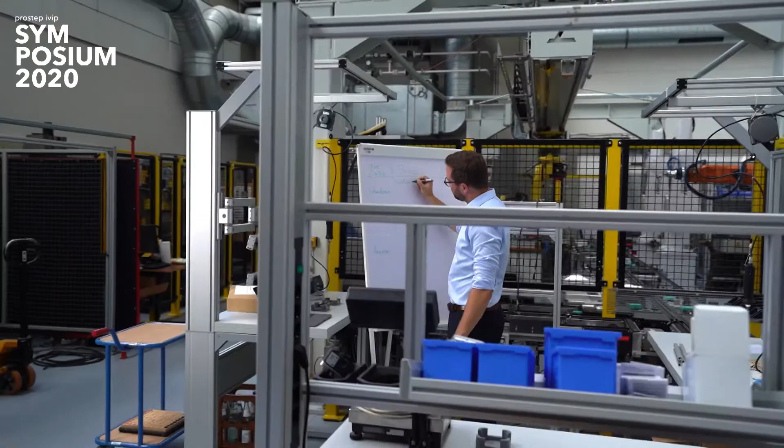And now we have it on stage. Max, thanks a lot, I think it was a great video and award trailer. So it's my honor on behalf of the association and the community to recognize your great work. We hope your future career will go along as planned.

What we have for you is — I'm not allowed to touch it — basically a little check here for you. But most important is the scientific award, a nice paper here. I think you've done tremendous work using bending moments in the tool holder to find out what's happening at the tool during body shell element milling. That's great work, we appreciate it, and we wish you all the best for the future. Thank you very much, very good. A little applause here.

Yes, he deserved it. So with that, we have a second category: the winner of the Best PhD Thesis in the global world of the prostep ivip Association. I'd like to first introduce this work: 'Hybrid Prototype in the Loop for Early ADAS Controllability Testing' by Dr. Christian Buchholz. Let's have a look at the trailer first.

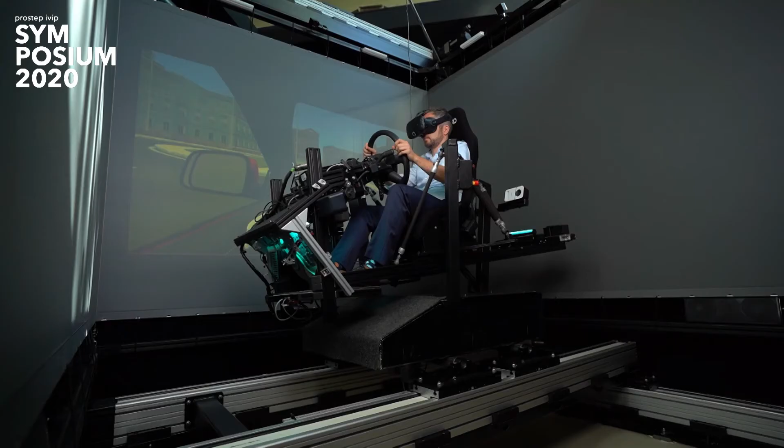All right, let's welcome Christian on stage here. A little bit of a hand here in the room.

So maybe tell us a little bit, what was your biggest challenge when you were doing this research? Bringing all the pieces together, doing this excessive testing, this excessive work in preparing the drive simulator. So it was really, really a big technical setup I had to manage. And yeah, writing it all down, which takes like one year. So yeah, let's summarize it, everything was challenging. Now, great achievement.

We talked about a lot of model-based systems engineering in a verification environment. So since we know each other well, maybe my last question to you, I might be allowed to really ask this question. What are you doing with the money, actually? Because I forgot to say 1,000 euro for the best master thesis, you will receive 4,000. So what are your plans?

No plans anymore, I already donated it. So to UNO Refugees Help and to Medico International, two organizations that support refugees. So I already donated the full 4,000 euros, so I'm happy to get my money now. Yeah, very good, so that's excellent. So we fully appreciate that.

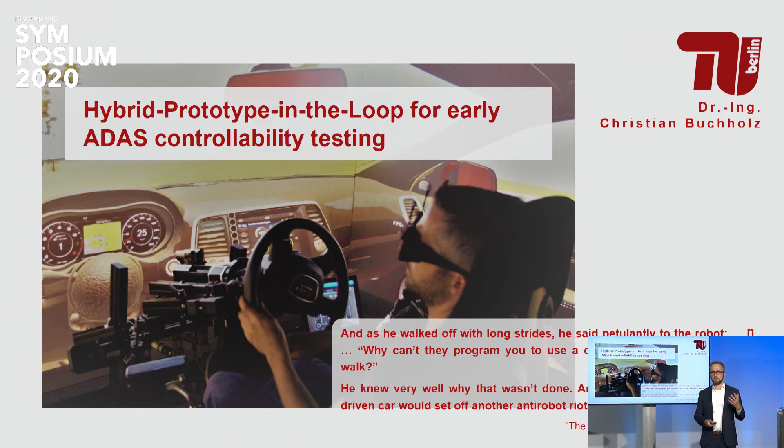Thanks a lot. Yeah, so in the following minutes, I would like to present you the results of my thesis. First of all, let's have a word on myself. As the video already told you, I'm 38 years old. I'm automotive engineering from education. I was, as you can see in my CV, active in other industries before I started my PhD thesis at the Chair of Industrial Information Technology from Professor Stark. What I will present you is the result of this work. Today I'm working at another company, Dassault Systèmes, and what I did there is to do a follow-up of my research. I'm working as a systems engineer to support companies in the field of systems engineering, to bring back also my academic knowledge in the field.

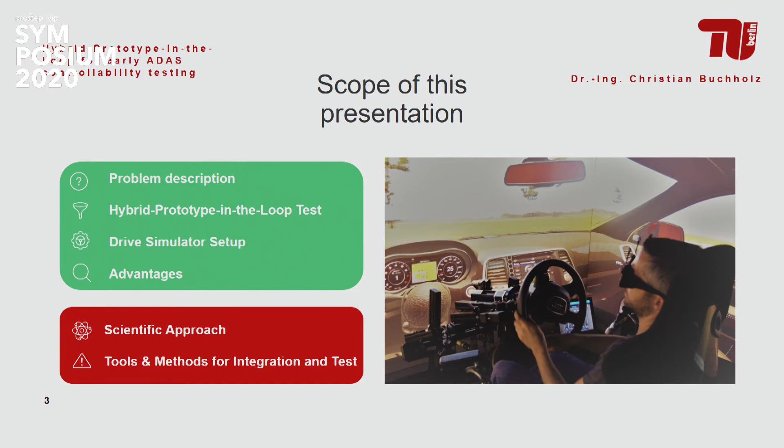So, regarding the presentation, let's first of all talk about the scope of the presentation to manage your expectations. So, what you see here, you see the green and the red field. So the green is what I want to talk about. The red, not here, not this place, but feel free to ask and to contact me whenever you like. So what I would like you to understand is, first of all, what is the problem I want to solve? Secondly, what's my solution approach? There's a special point on my solution approach, the drive simulator, which I will tell you a little bit more about. And then at the end, I want to talk about what advantage would an industry have applying this approach.

I won't tell you about the scientific approach here in detail - you can have my PhD thesis later if you like, you can see a lot about the scientific side there, and tools and methods for integration and test that I also developed. I'll put that a little bit out of scope for this presentation.

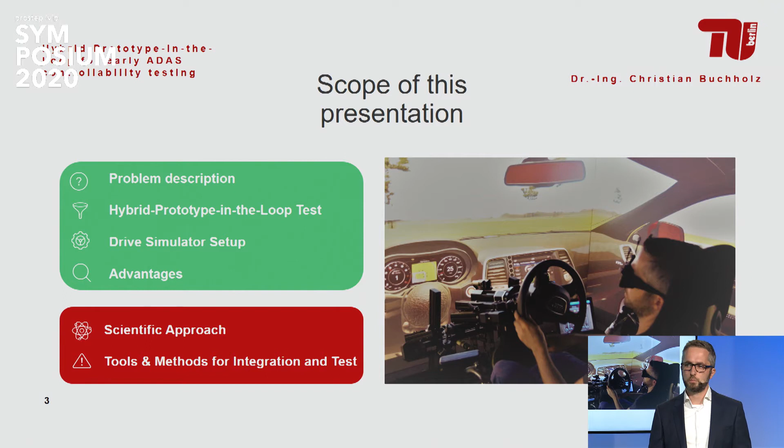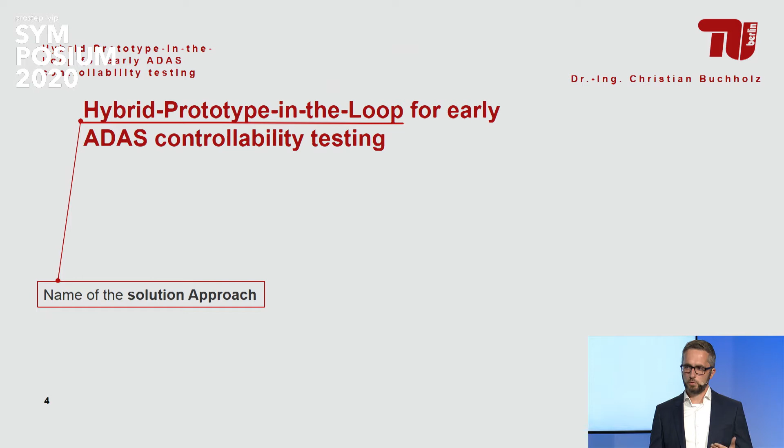So let's go back to the title to introduce you to what I already mentioned - the hybrid prototype in the loop is the name of the solution approach. There's another point, ADAS, which is likely familiar to all of you, but if not, it's an abbreviation for Advanced Driver Assistance Systems - systems that support the driver in his driving tasks, that may control the vehicle in order to avoid accidents and interact with the driver through displays and control elements.

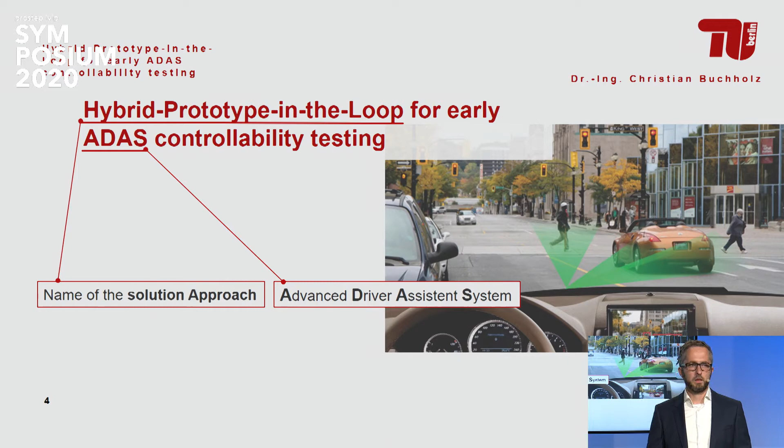This directly leads to the problem, because what we see here is a lot of new technologies arising, and these technologies at least have the potential to change the interaction between the driver and the ADAS in the future. So let's look at some examples from the pictures I chose.

First of all, new digital control and display technologies, like big screens everywhere in the car, touch surfaces everywhere in the car. We also see the big trend of autonomous driving - for me it's more about the interaction between the driver and the car, so it's about semi-autonomous driving, where the driver still has a significant role in the driving task.

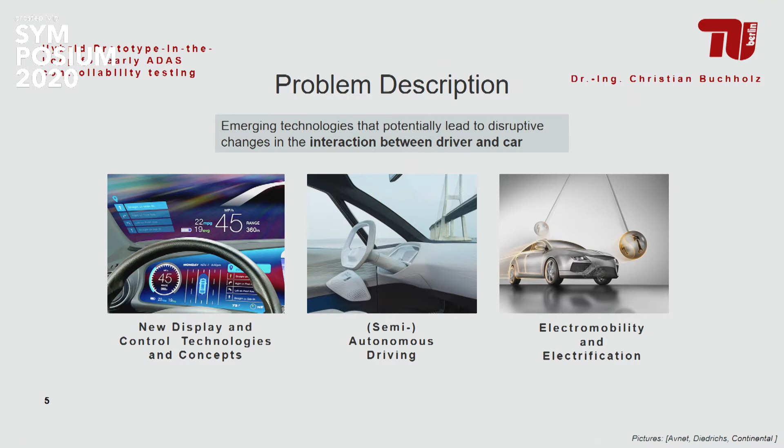And last but not least, electromobility, electrification. So what changes in the interaction between the driver and the car when we're talking about electrical cars? And there are a lot of changes.

This interaction between the driver and the car is heavily connected with an issue from functional safety development. It's called controllability, which you also see in my title. Controllability can be summarized by three pillars - basically it's about perception of a situation by the driver, the decision for a countermeasure, and the performance of the countermeasure.

This has an impact on the second stage, the decision for countermeasure, because in the future the driver always has to take into account the reaction of the system to its countermeasures. So he cannot only think about the countermeasure himself, he always has to take into account the countermeasure of the system. And furthermore, there is always a control element.

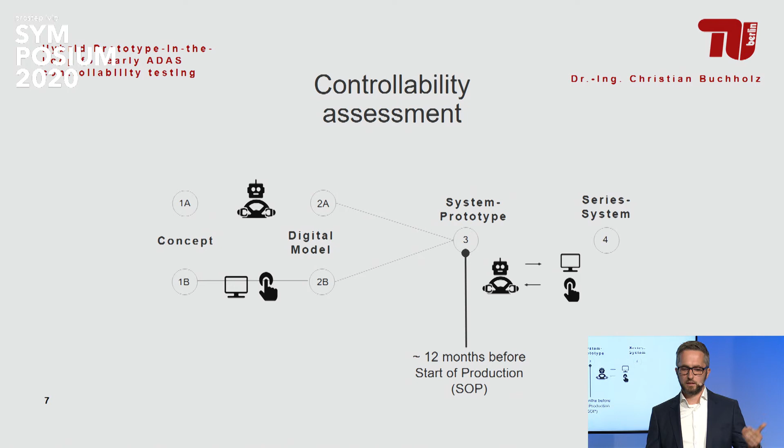Taking into account a 4-year development cycle, after just 3 years of development, it's the first time you can really assess controllability by test. For sure, today you can take a look at it with an expert view, you can check it, you can review it. But if you think about how these systems will change and how complexity will increase, you have to test it anyway. So the basic idea from my thesis comes from this point of view.

The basic idea is to get a front-loaded test - to enable the earliest integrated test as possible. For this, I use the earliest executable models from development - I took development prototypes that already exist and integrate them into a new type of prototype. This is the name-giving hybrid prototype, tested in a mainly virtual environment provided by a drive simulation.

Just a quick look back - why hybrid? Hybrid is just a prototype that has as many virtual elements as possible, but for sure, if I want a touch screen, if I want some control buttons, I still need some physical stuff. That's the basic idea - make it as little tactile as possible, with as much virtual element as possible.

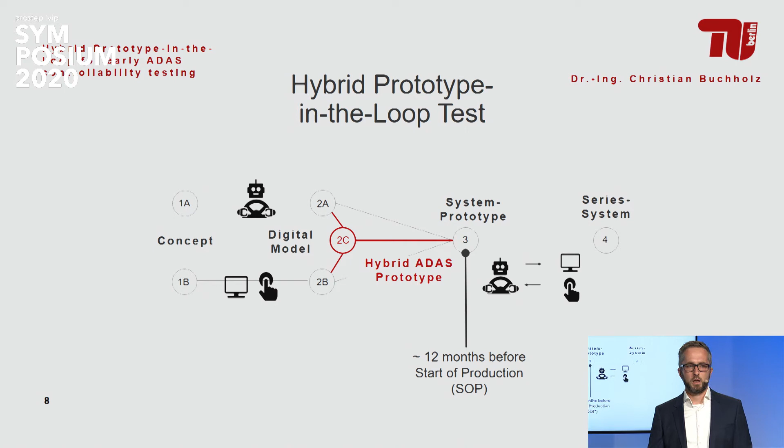Taking a look at the setup I use there. First of all, you see the left side, which is mainly about the system environment.

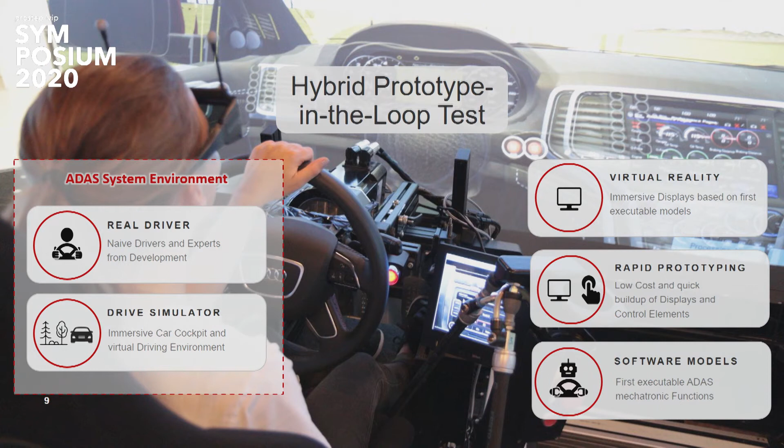The system environment, for sure, is the real driver, which could be either an expert from development or a naive tester with no contact to development whatsoever, and the drive simulator. The drive simulator provides the cockpit, something the driver can interact with, and the virtual environment, virtual car and so on.

On the other hand, we see the hybrid ADAS prototype, which is based mainly on three pillars. First, virtual reality, which is a good way to make the driver understand virtual displays, especially visual displays. Secondly, rapid prototyping for the rest of the displays, for the haptic interfaces. You need something at this stage in development to build prototypes very quickly and provide them to the driver very quickly.

Last but not least is the usage of software models. Usually in development this is MATLAB Simulink, but could be something else, for example an executable SysML model. It's basically to integrate the system behavior into this prototype.

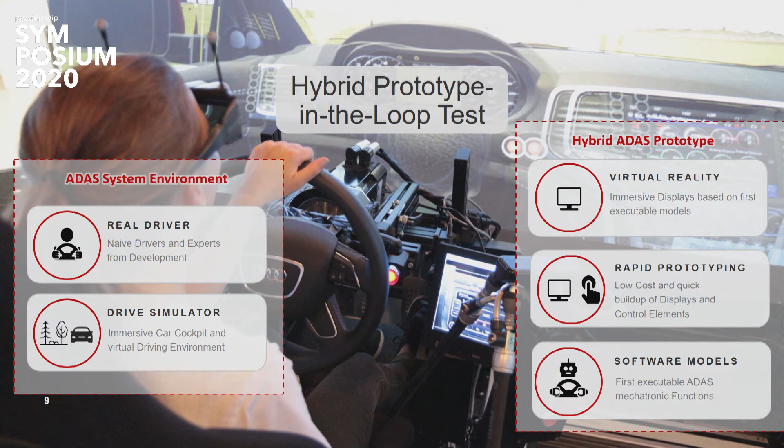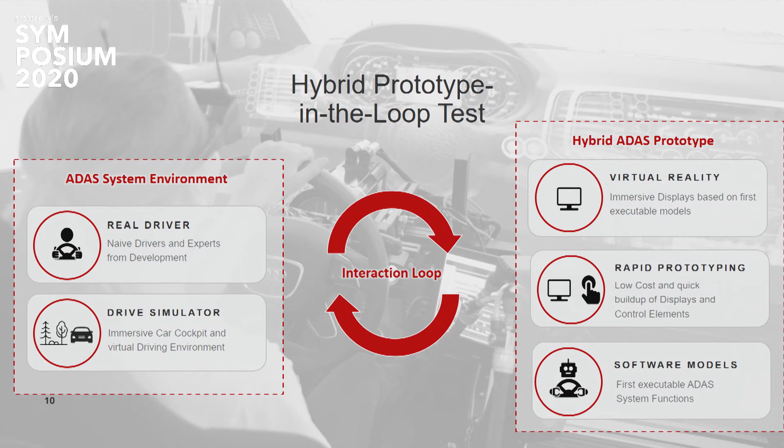And these both are tested in a loop. That's the name-giving interaction loop. That's why it's called hybrid prototype in the loop test, the loop between the prototype and its environment.

So we did a lot of tests, as I already mentioned before, answering Professor Stark. These tests were processed by both experts from development as well as naive test drivers. Let's summarize the main conclusions out of these tests.

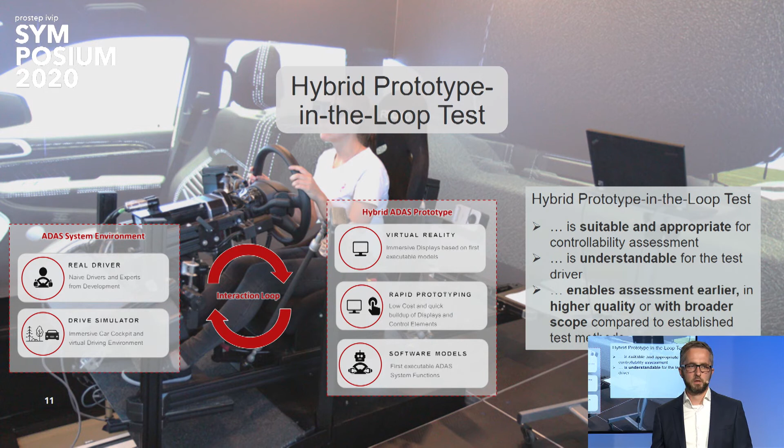First of all, the hybrid prototype test approach is generally suitable and appropriate for this controllability assessment. The driver understands the test and also understands the prototype. And basically, that was the target, we can assess earlier than today, or take it the other way around.

When we take a look at the sub-prototypes we built this ADAS prototype of, we can do much broader tests than with a normal software model test, and we can do the tests in much higher quality.

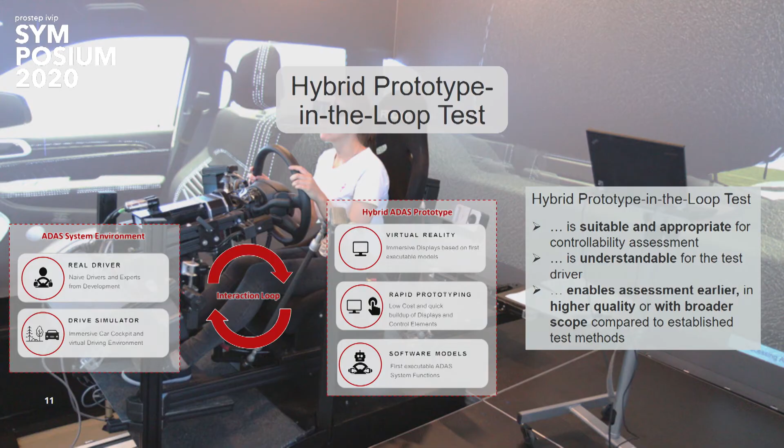A further finding was about the drive simulator. The drive simulator, as I mentioned at the beginning, is a key element, and it's key to find the right drive simulator in order to run the tests. That's why the main development within the thesis was a method to find out what's the right drive simulator.

And basically it can be summarized into three steps. First, provision of a to-be setup which respects the use cases. Secondly, provision of technical specifications, taking into account today's simulator technology, and last but not least, the methods and tools to use this, respectively to get test results.

Using a quick example, a visualization system, this could be the field of view or the resolution of the system, which can be directly connected to a technical specification, as for example from a head-mounted display.

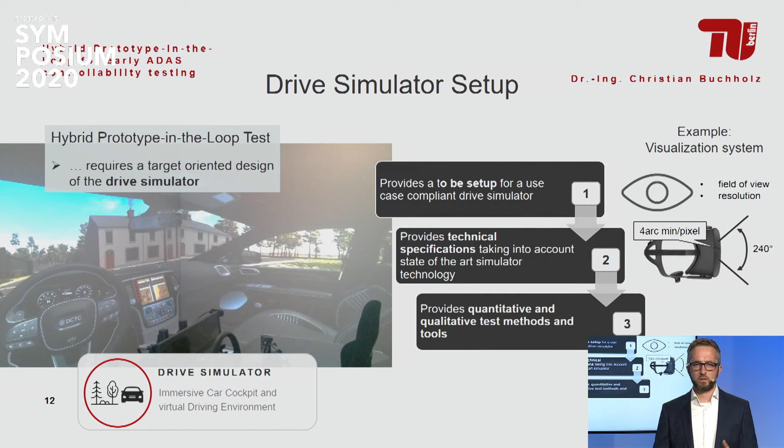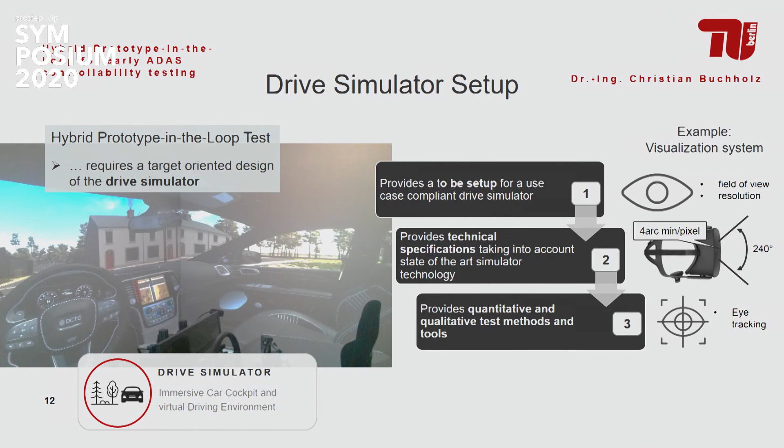And for this kind of test, eye tracking is quite useful in order to follow the driver's eye looking to the display. So to summarize the evaluation, on one hand there's what is seen on the right side, what I just mentioned.

First of all, we for the first time have a method to evaluate and design the right drive simulator. That's a key finding, and it's not only useful for this specific use case, but also for other use cases. So you can not only test controllability, but also ADAS functions or new interfaces.

The second main finding is described by the other two pictures on the left and the middle. Using the hybrid prototype-in-the-loop test approach, you can do a broad controllability test, and this test can be done 12 to 18 months earlier than today's controllability assessment with cars.

But there is the word 'broad' in there. It's not a full test, because as you can imagine, when you use software models, you cannot test regarding software safety. For this, you need code.

Or if you integrate a display in a drive simulator, you won't see if there are, for example, some visibility issues or reflections when it's installed in the real car. Still, you can test a broad range of controllability.

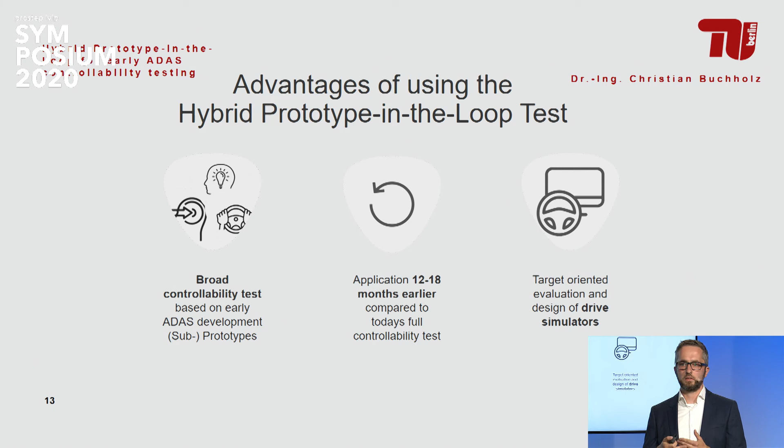Secondly, you can test these new forms of driver-ADAS interaction, and this quite early. And last but not least, you can sit everyone inside, also your manager who has no idea about the product itself. So you can ask him, okay, can you evaluate this, can you give your opinion? And so you can take decisions based on very, very early prototypes.

That's it from my side. Thanks for listening, and yeah, I'm open for questions.